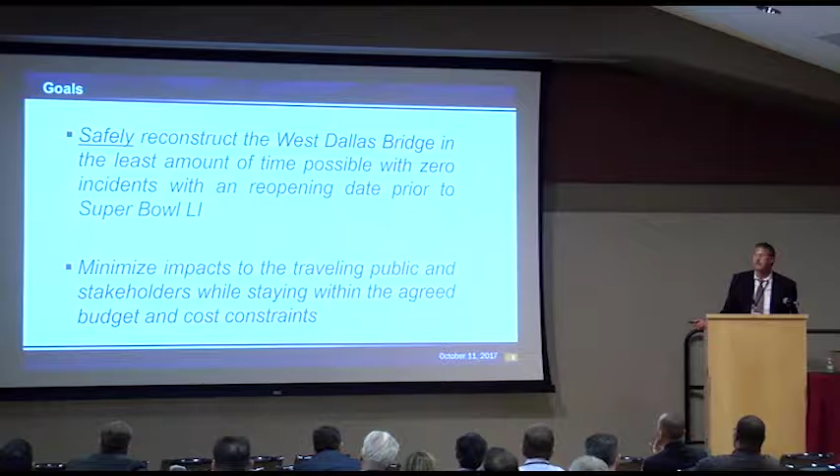How did we handle the communication? We had long-standing relationships built on trust with the stakeholders and our industry partners. We had two goals: safely reconstruct the bridge in the least amount of time possible with zero incidents, and minimize impacts to the traveling public, while completing the project within the allowable time constraints and budget.

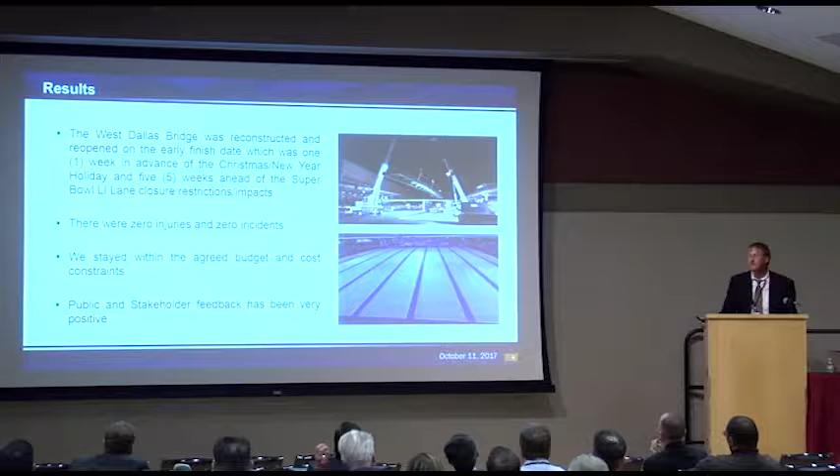The results were: we rebuilt the bridge over 3 weekends and 1 weeknight, and opened it 1 week before Christmas—5 weeks ahead of the start of Super Bowl 51 activities and lane closure restrictions. We had 0 incidents, 0 accidents on the job, and 0 injuries. We stayed within the agreed budget and cost, and public and stakeholder feedback has been very positive.

How did we do it? Communication was key. We talked every step of the way. We broke down the lines of communication. Instead of just giving the contractor a complete set of plans, our contractor was directly talking to our Houston District Bridge engineer and his staff.

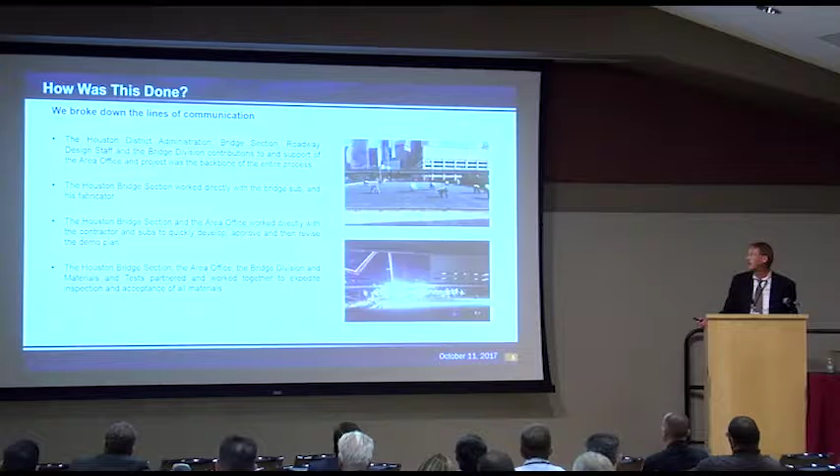The fabricator was talking directly to the staff of the bridge section. I was talking directly to materials and tests, both in the shop and in the field. We broke down the lines of communication to make sure everyone was talking as quickly as we could. We made sure the right person was in the right place at the right times, at all times, and that quick decision making was based on sound engineering judgment by those most qualified to review the issue.

Again, multiple TxDOT sections worked together with our industry partners to develop the plans and the TCP. We didn't just give the contractor a TCP—we sat down with the contractor and his TCP sub multiple times and tweaked our TCP to get what we wanted. It was complicated: closing I-45 northbound and southbound at the same time actually takes 22 separate closures of that corridor to get it completely closed. It was mind-boggling to do it in such a short period of time.

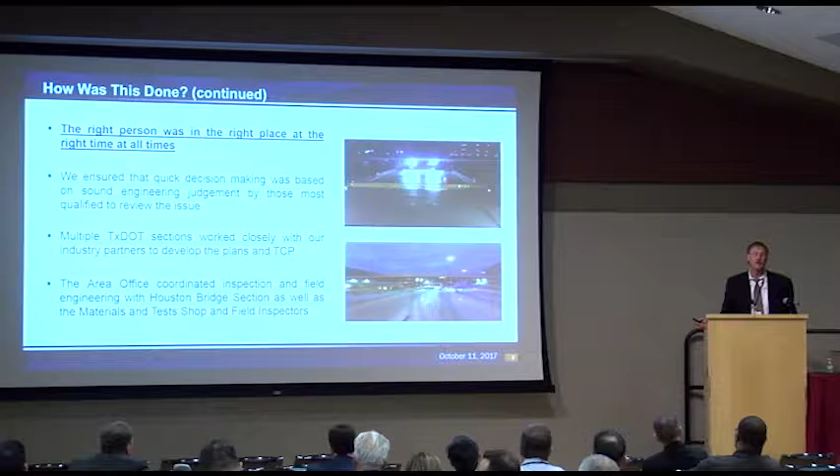And then the area office wanted to do something different. We wanted to make sure we rotated young and inexperienced inspectors through the project to let them see what an accelerated project was like. So we paired them with our experienced inspectors.

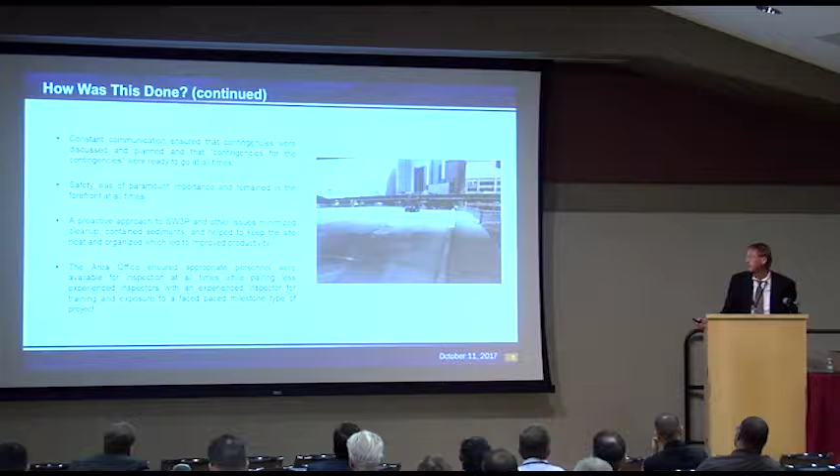We've already talked about constant communication and safety. We also didn't forget SW3P, using a very proactive approach. Quite honestly, if we kept a neat work site, for instance the night of the bridge deck placement, we could get the freeway open quicker. And again, we made sure the right people were there, pairing inexperienced inspectors with experienced ones.

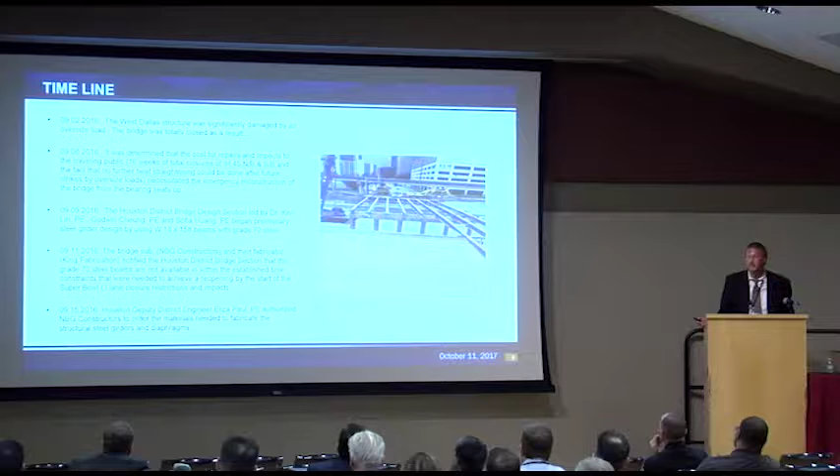The timeline: September the 2nd, the bridge was hit. I'll speed forward a little bit. By September the 17th, we had figured out we could reopen the bridge to 2 lanes with a greatly reduced load limit. By November the 4th, our steel girders had been fabricated to the point where we were confident we could reclose the bridge completely and start demolition.

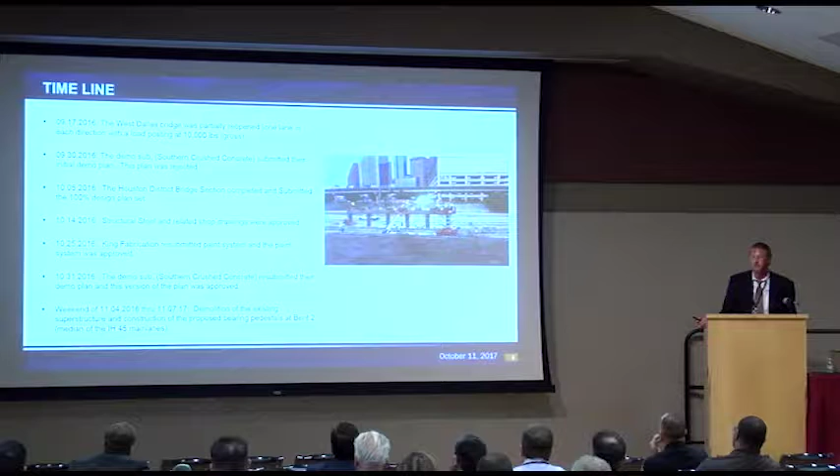The first weekend, we demolished the bridge and rebuilt the bent cap bearing pedestals in the median at Bent 2, the median of I-45. The following week, we modified the bearing pedestals on the abutment caps. Then the weekend of 11/18 through 11/21, we hung the structural steel girders and the diaphragms.

What was unique is we hung them with PMDF already installed. The PMDF was installed on the pairs of the girders at the fabricator.

The week of 11/21 through 11/23, we got ready for the rod busters to come in and start placing the rebar the week after Thanksgiving. We actually took the weekend of Thanksgiving off because we had lane closure restrictions, and we had already hung the girders and weren't quite ready to pour the bridge deck.

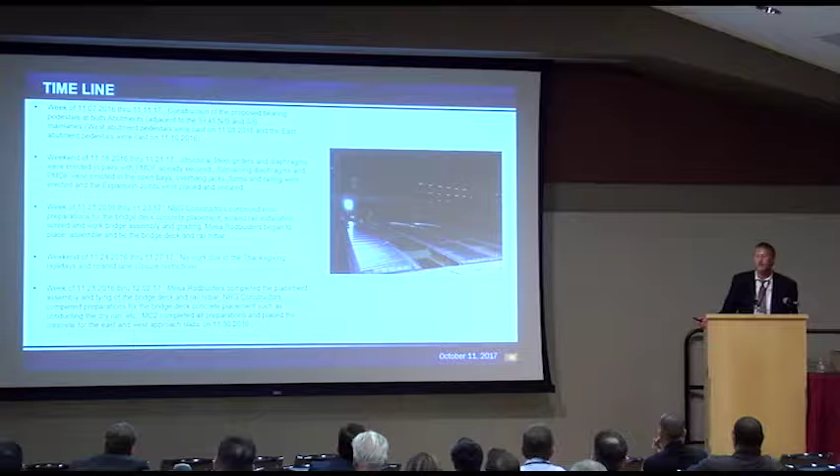The weekend of 12/2 through 12/5, once again, we had demoed the bridge just a month before and were ready to pour the bridge deck. Rains moved in and it rained all weekend. We did all kinds of things to try to get the rain to stop, and none of them worked.

So we had a contingency plan, and that was to go on a weeknight if we had to. Going on a weeknight had some risk. Again, it took a long time to close I-45 northbound and southbound, and a long time to reopen it and pour a bridge deck all in one night.

But again, with planning and working with our industry partners and stakeholders who bought off on us closing the freeway on a weeknight, we got the bridge deck poured that night and had the road open by 4:15 that morning.

We spent the next week or so doing things like putting on pedestrian rail. The original bridge had a concrete curb. We actually put a low-profile concrete rail that came from a new standard on the deck. And on December the 16th, before the evening rush hour, we reopened the bridge. So we closed it completely on November the 4th and reopened it on December the 16th.

Again, that's key because it was a week before Christmas with holiday events in downtown almost every night, and it was 5 weeks before the Super Bowl lane closure restrictions went into place.

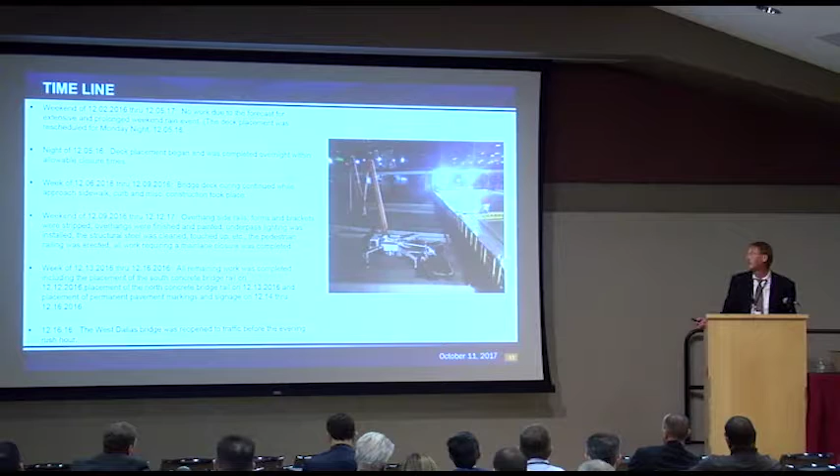This is a team effort, and every member of the team participated, from the area office to the different sections in the Houston district, to the bridge division, to our industry partners, to our officer coordinator. We made sure the right people were talking, and that's the takeaway I have for you: we put the right people talking to the right people, making decisions based upon that and getting the most qualified person to give you a quick answer.

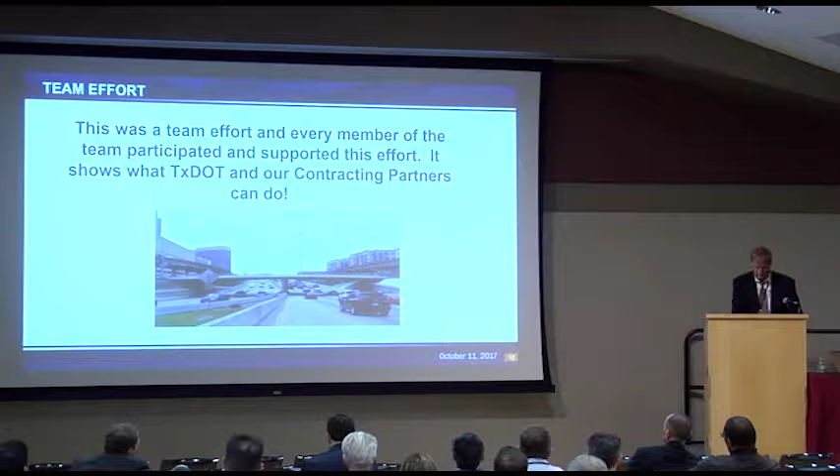I'm going to close my talk, and I have a time-lapse view of the project that I'm going to run, and then Graham Bettis is going to follow up and start talking about accelerated bridge construction on a statewide basis. And I cannot find it.